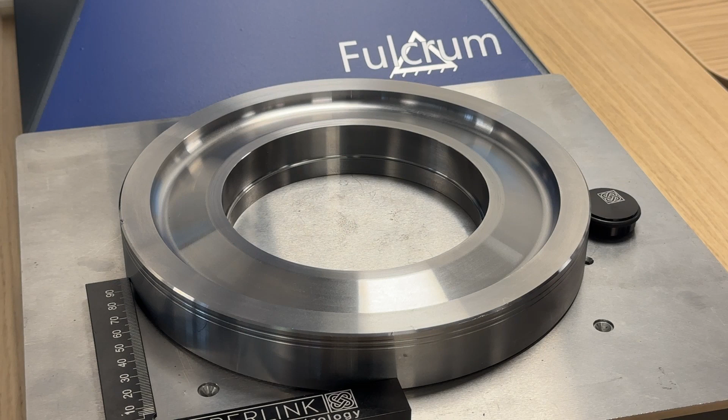Hi everyone, in this video we're going to be showcasing the new innovative software solution to measuring cross sections on the Fulcrum. The typical problem with manual machines when measuring cross sections of turned components, just like this one, is that there's no way to lock off the axis. So when we try to scan the cross section, because we can't be exactly on the center line of the part, the measurements are no good and can't be used.

However, this new projectional scan option within the software solves this problem, and it makes it very easy to measure cross sections just like this on the Fulcrum. So let's have a look at how it works.

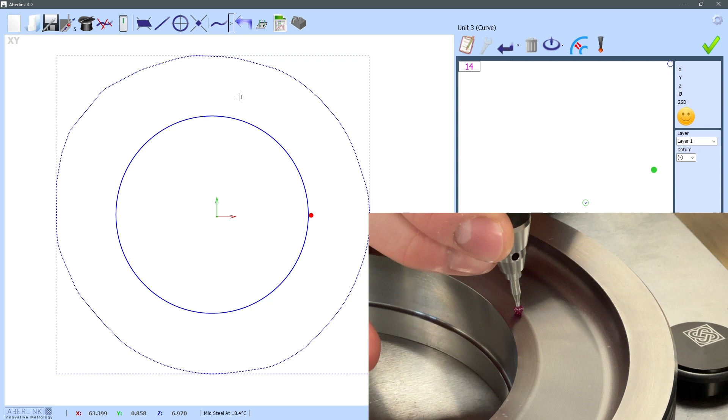I already have the plane and circle measured on the component, so all I need to do now is make sure that I am in scanning mode, make sure the probe is switched on, and then open up a curve feature. We're then going to tap at the start, continue moving the stylus over the cross section. It doesn't matter if we stay on the center line or not, the software will take care of that later, and at the end we pause. That completes the curve measurement.

Now we have the curve measurement, we need to project the points through a sectional projection. This is the new innovative software feature that allows us to measure this.

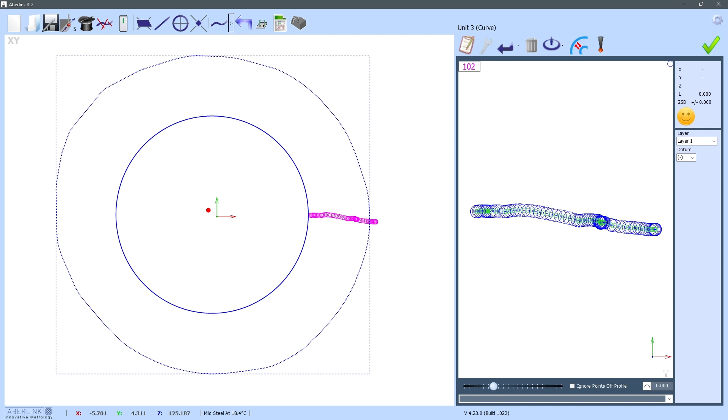So right click on the curve, and at the moment it's just a bunch of random points, but if we select the projection plane here, then select measured and left click or select on the center circle, the software will ask us, do you wish to use a sectional projection? If we click yes, it will then ask us if we want to update the template.

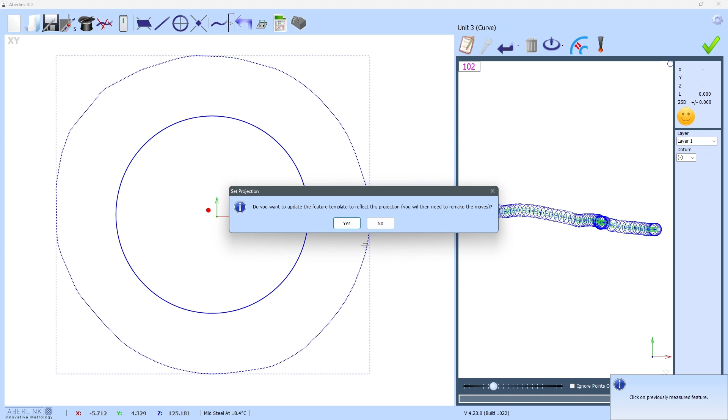We'll click yes, and you'll see immediately there in the view, it now matches up the sectional projection in which we scanned. So even though we weren't on the center line, the software was able to fit the points to a sectional projection best fitted to this circle. So no need for any axis locks. It's a very innovative software solution.

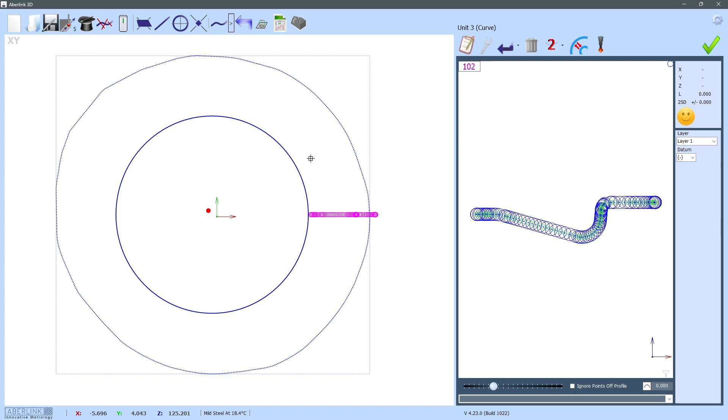So now, just like any other feature, if we hit the green tick and we go to the XZ view, you'll see this is a bunch of data points which we can then construct the individual features and dimension them.

To do this, it's a simple process of selecting the feature you want to construct, hit the construct button, and then either individually pick points and it will draw the line out here, or we can select the feature and drag a box around the points we want to use to construct that feature. You can do this for any number of features.

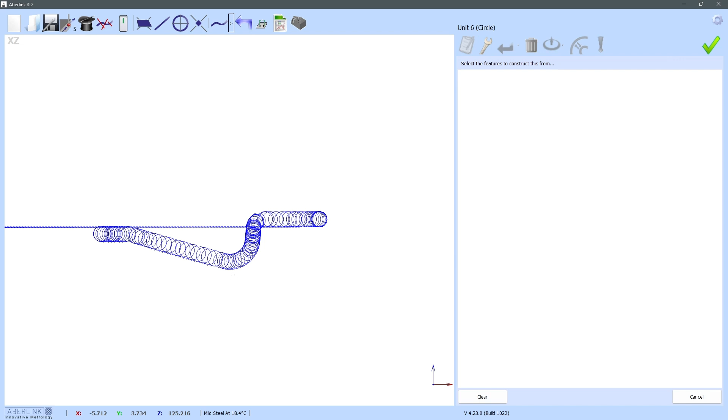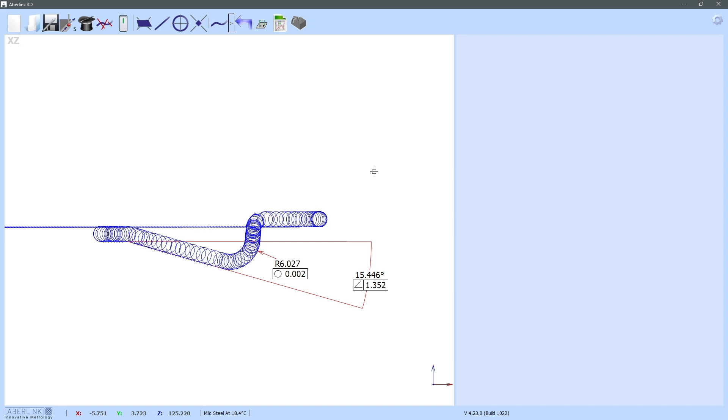You'll see here I'll do this for the radius, and the idea is we can now select these features and measure them where we previously couldn't get any dimensional data for them. So very useful, and now we can effectively measure cross sections of turned components without the need for any axis locks.

As a last step, just an additional benefit of the Aberlink 3D software package, we can import DXF. This is a perfect option for this. So when we've done the cross-sectional scan, instead of constructing all the individual elements, it's often required that you can actually do a profile check to the DXF.

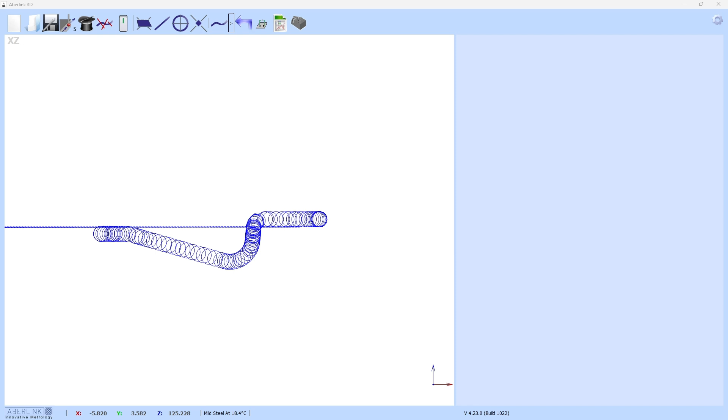So with the Fulcrum, we go to Settings, click on the Import DXF button here, and then select the DXF. You have the option for importing as an inspection template or a curve profile. For this we're going to use curve profile.

So click next, select the plane that it's projected into, so we're using the XZ view, hence it being selected here. You can change this depending on your application. We have units, default tolerance, and whether you want to round the corners or not. So I'm happy with all this, I hit finish.

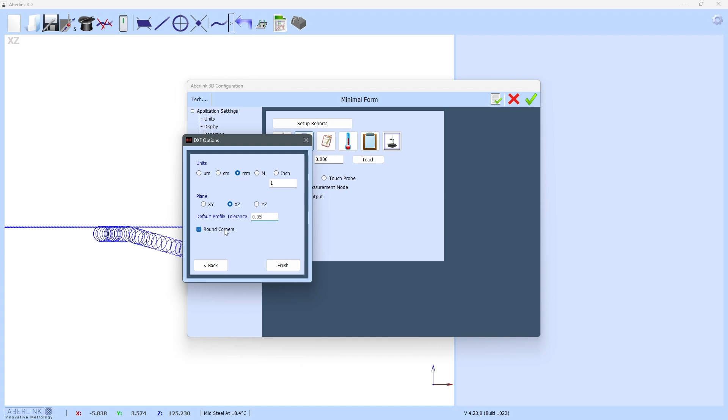Just close that. So this DXF fit window allows us to nudge the DXF around like so. We can also rotate it, or if you press the mouse wheel in, you can offer the DXF up roughly to where you think it should be, and then if you press play, the software actually does a best fit, and there we go.

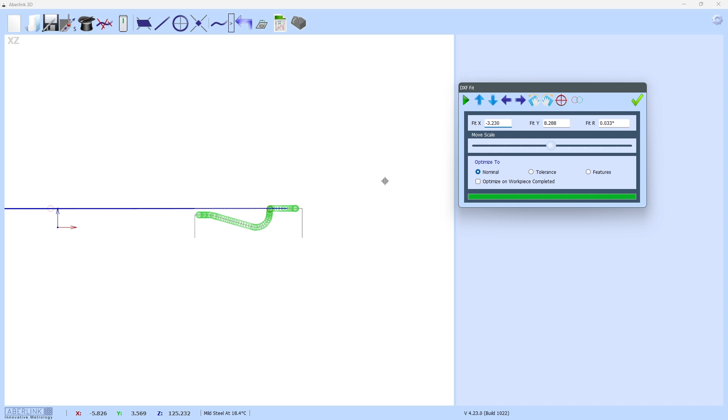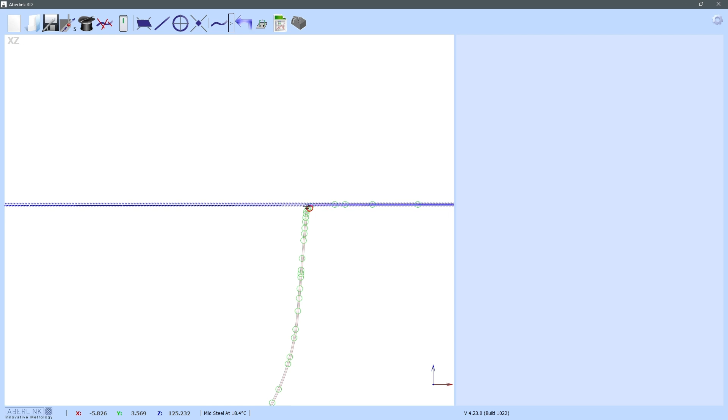So we can see there any points that we've scanned that are inside the tolerance zone. The red is the DXF, the grey is the plus or minus 50 micron tolerance zone. You'll see any that are in are green, any that are out - so it looks like there's a little bit of a bump here on the chamfer. You'll see everything else fits in okay, and that's how we do a profile check to a DXF from the scanned cross-sectional data.

The idea is we can dimension the curve and we get a profile call out to make sure it's within spec. So that is DXF comparison with the cross-sectional scan.